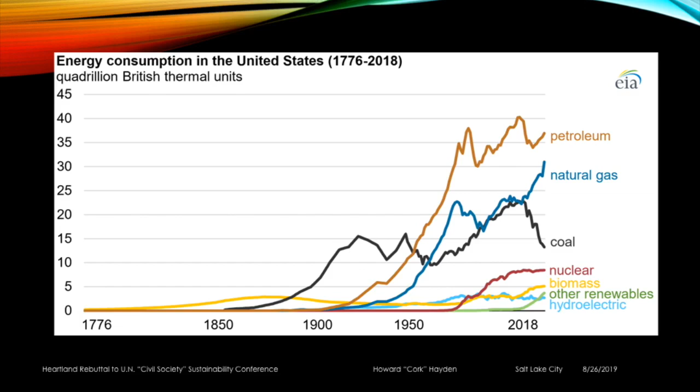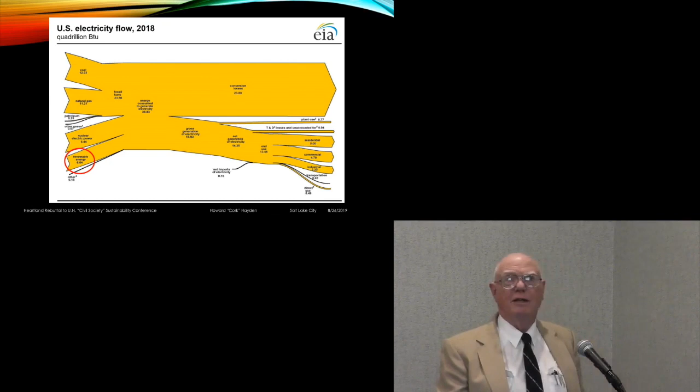Here's a plot of the electricity flow. And way over here in the lower left corner is a thing called renewable energy, which is a very, very small fraction of the electricity flow. This is showing the renewable energy consumption on a fuel by fuel basis. There's hydropower in the light blue, biomass, which includes some ethanol and mostly firewood, that kind of stuff. Wind and solar down there in the lower right. The horizontal line represents 2 quads. That's a quadrillion BTUs. But the annual consumption in the United States is about 100 quads.

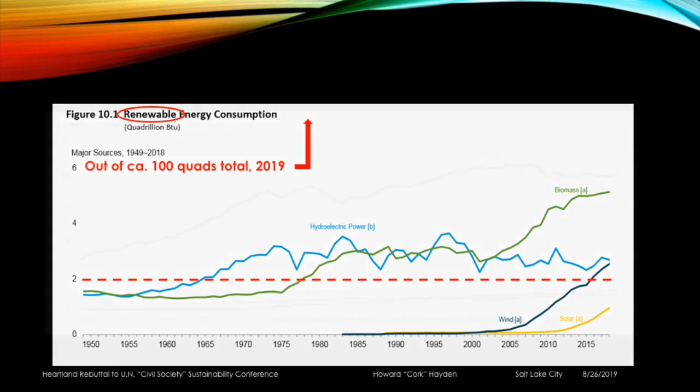And there's a subsidy that isn't listed here, and that is that solar and wind are, to repeat, very, very unreliable, and they have to be backed up by reliable power sources. And those power sources are running at lower efficiency than they could because they're driving in heavy traffic, so to speak, accelerating, stopping, accelerating, and stopping, and so forth. There's a huge subsidy provided by those.

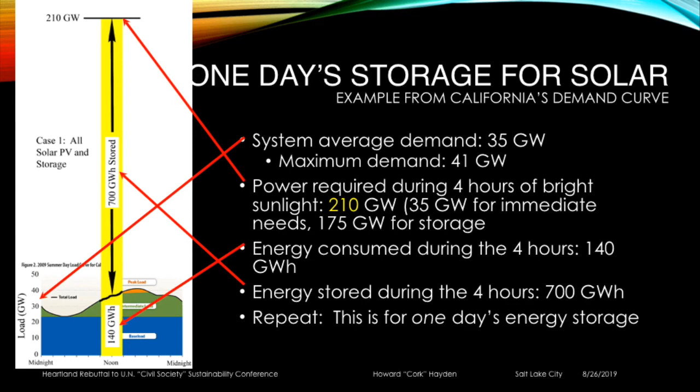Okay, but if we're going to be storing enough energy to last for one day, we have to have 210 gigawatts of available solar power. Okay? 35 gigawatts for immediate needs, and 175 gigawatts for storage. The energy consumed during the 4 hours is 140 gigawatt hours. The energy that is stored must be 700 gigawatt hours. And that's for one day.

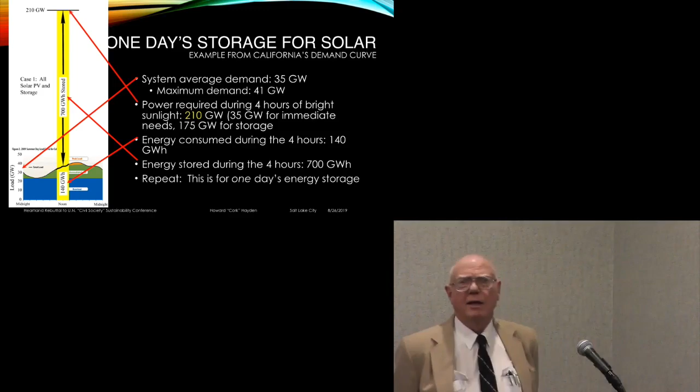Now we're going to take a look at wind. The black line there is the power curve for wind. You notice that at a speed below about 4.5 meters per second, which is in the range of 10 miles an hour. The blue lines there represent speeds in miles per hour. On the lower scale, it's in meters per second. Below about 4.5 meters per second, you get no power whatsoever. Then the unit turns on and you start getting some power.

And in the range of around 5.5 up to about 13, 14 meters per second, there's a very, very dramatic rise. A 10% change in the wind speed results in a 30% change in the power, or a change in wind speed from, let's say, 10 miles an hour up to 20 miles an hour gives you a factor of 8 in the amount of power. And it's very hard to keep the line stable when you've got variable wind.

Over half the time you're producing less than half of the nameplate power, and only 11% of the time are you producing full power. This curve that looks a little bit like a distorted bell curve is the wind profile at an outstanding site, 700 watts per square meter in the wind. And the scale on the right is the number of half hours per year that you get wind at various speeds. So you see, the wind is a pretty unreliable thing.

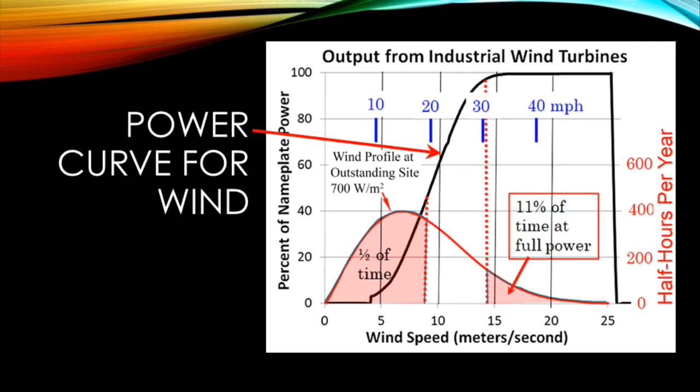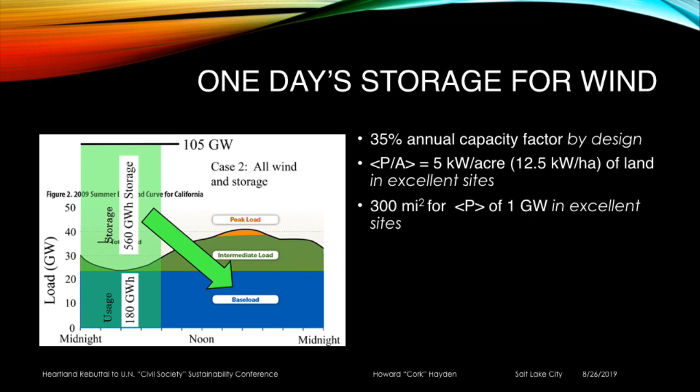And another problem about wind is that the amount of power you can produce per unit area of land is about 5 kilowatts per acre, or 12.5 kilowatts per hectare of land in excellent sites. And to produce an average power of a gigawatt, which would handle about a city of 700,000, you have to have 300 square miles.

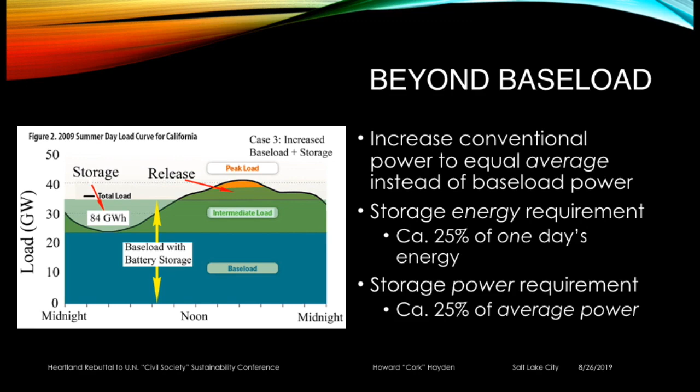The storage requirement is about a fourth of 1 day's energy, and the storage power requirement is about 1/4 of the average power. So here are the requirements for getting something like 99.9% reliability. First line there, for solar and wind, you have to store something like 5 days worth of energy. But with the enhanced base load, you have to store 1/4 of 1 day's energy. So solar and wind is worse by a factor of about 20.

Next line down, you have to have 20 to 30 times the average charging power in order to charge up your system to last for days. With the enhanced base load, you only have to have about 1/4 of the average power, and therefore the solar and wind is worse by a factor of somewhere around 80 to 120.

Now, solar and wind, you have to have 100% of peak power available from storage, and if you just have enhanced base load, you only have to have about 1/4 of the average power from storage, and so solar and wind is worse by a factor of only 4 in that case. Oh, and we should talk about efficiency, but we won't, because you lose energy when you charge up a system, and you lose energy when you discharge it and so forth.

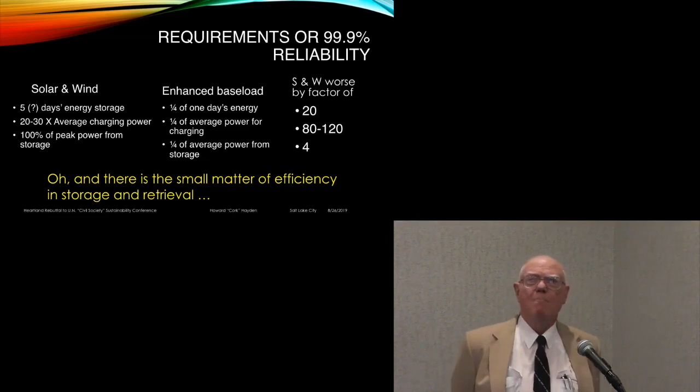Okay, comes the argument, well, it's always available somewhere. Okay, the sun is shining in Arizona, the power is needed in Philadelphia. The wind is blowing in North Dakota, power is needed in Los Angeles. You have high winds in Florida, but Chicago needs power. Each location there must be able to supply enough power for more or less everywhere. And of course, you need one heck of an enhancement of the grid.

Now, to make a case here, Mark Jacobson and Mark DeLucchi at Stanford say this, and I quote exactly: "We estimate that around 3,800,000 5-megawatt wind turbines, 49,000 300-megawatt concentrated solar plants, 40,000 300-megawatt solar PV power plants, 1.7 billion 3-kilowatt rooftop PV systems,

5,350 100-megawatt geothermal power plants, 270 1,300-megawatt hydroelectric power plants, 720,000 0.75-megawatt wave devices, and 490,000 1-megawatt tidal turbines can power a 2030 worldwide WWS system that uses electricity and electrolytic hydrogen for all purposes."